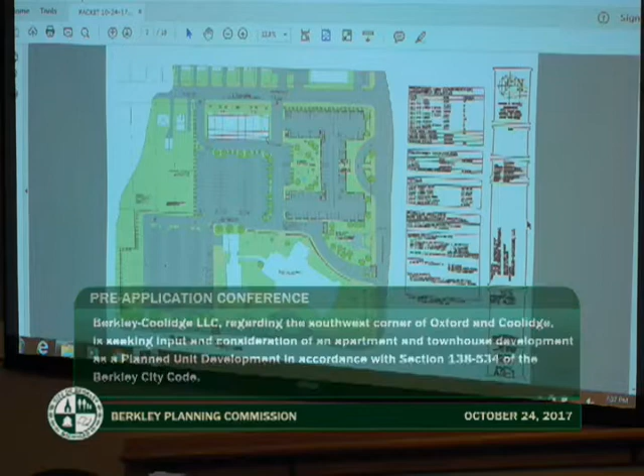From the Coolidge Highway view heading westerly, the building will contain new plantings of trees and shrubbery along the curved driveway, the building frontage, public park, and also upon the roof of the building itself, we use a sedum. The northern boundaries along Oxford Road will be lined with townhouses, each having varying trees and shrubbery, in addition to the existing trees along the streetscape itself. The western property lines we plan with mature spruce trees, and further along the north, virtually the western portion and the northern boundaries of that western portion, there will be short and tall plantings to minimize any vehicle lighting or other penetrations. Additionally, there will be masonry or other walls constructed to enhance the view.

Throughout the parking lot, we will have plantings mixed into the parking islands. Also, the courtyard of the building will contain a mixture of plantings, seating areas, and other elements to create a scenic entry point and a more viable atmosphere for the entry.

Number four is the provision of open space or public plazas. Proposed site and building plans will offer a greater amount of open space and public plaza. Along the Coolidge Highway frontage, there will be a public plaza incorporating permanent benches and tables, potentially for board games, trees, green and other flowering plantings, a public bus stop, public art space, and an adjacent flagpole commemorating the service of our veterans.

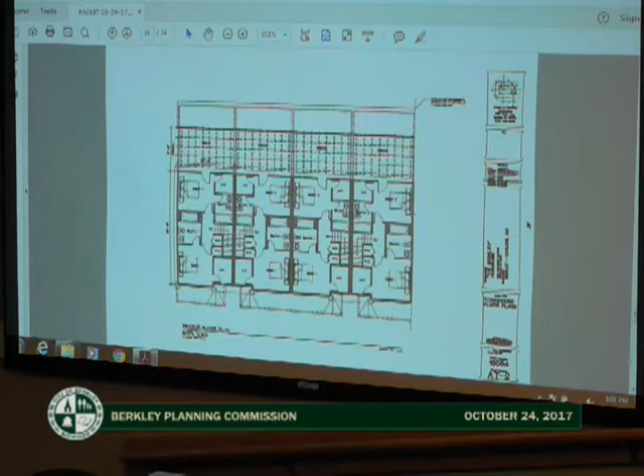There was a suggestion to try to clarify any kind of definition of seniors, as we've talked about our mix of the potential resident base that we'll have. Again, just to repeat that, we expect to have about one third of our base to be from Beaumont Hospital, one third of our base to be people of senior ages, and about one third of our base to be millennials.

To clarify that and create a distinction in how we refer to potential senior residents: active seniors, typically 55 and above, are still engaged in actions that are not necessarily sedentary. Seniors, primarily part of the baby boomer era post-World War II, want to live independently but do not require assistance to tend or fend for themselves. And seniors requiring assisted living, primarily older than those of the baby boomer era, have challenging health concerns or other situations that need help in feeding, dressing, grooming, reassurance of taking prescribed medications, or other ongoing assistance.

We do not intend to appeal to that segment and will not try to service that. We don't want to confuse anybody with those thoughts or definitions.

From this, we'd like to move on to the architectural aspects, which was the primary discussion two weeks ago at the work study session. If we could just go through an order of which we'd like to address these, we'll get into greater detail as we walk through the plans with you.

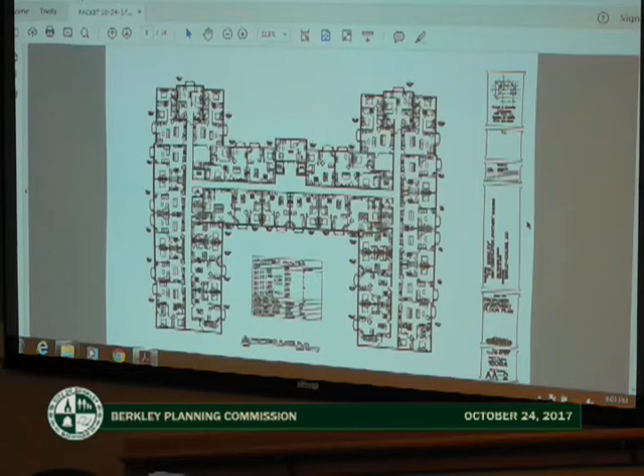Number 5, we have provided covered parking for a great number of our residents, as well as project and community assets only found in some of the finest multiple family projects in this area, or frankly anywhere. The placement upon Coolidge has mitigated the potential impact upon the adjacent communities, and the townhouse condominiums also eclipse the view of the parking lot in the rear.

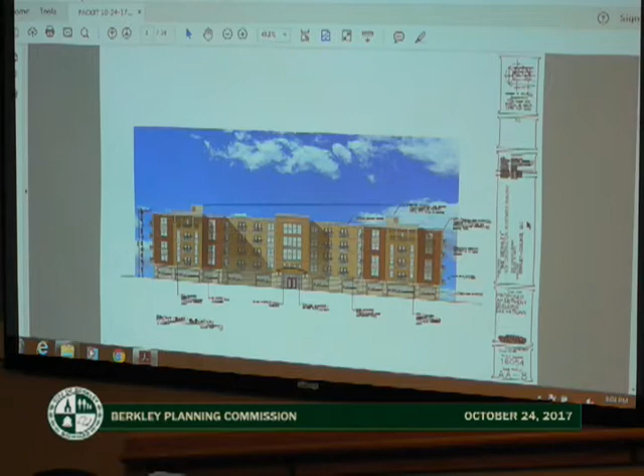Number 7, the design itself is a timeless design emulating a classic theme. Number 8, the podium structure allows for a more transparent view and lighter feel at the street level. For all those reasons, we believe this will be an asset to the community and the city of Berkley for many, many decades to come.

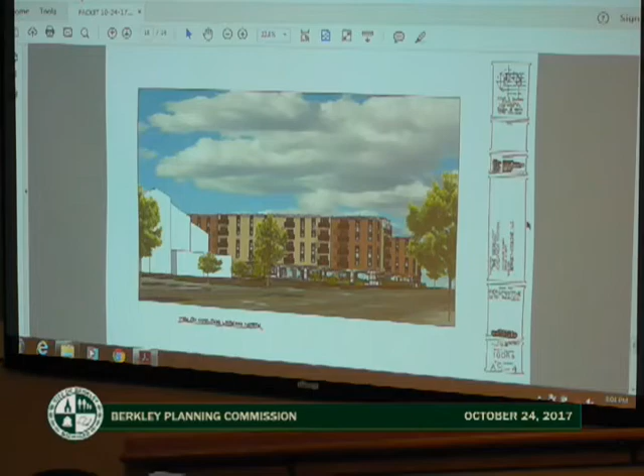Okay, so I'd like to start tonight with the Planning Commission questions. Who would like to go first?

Mr. Andgary: So at this point, are we really looking at these 7 items, and not getting into the minutia? We are looking to see if the applicant has demonstrated that they meet 3 of the 7 elements that could not be attained or obtained under a conventional site plan. Madam Chair, that's potentially meet, not prove. We're not proving tonight; we have an inkling.

More than an inkling. In that case, I guess I will start by saying that, 1 and 2, I've got the 7 items. Do you want me to just read the 7 items so everybody in the room has a sense of it? Sure, I can go ahead and do that.

So the zoning ordinance, section 138-534: the applicant shall demonstrate to the city that the PUD provides for the protection of the integrity of the surrounding neighborhood, and at least 3 of the following site design elements that could not be attained through a project designed under conventional zoning. Number 1, high-quality architectural design beyond the site plan requirements of this title. Number 2, extensive landscaping beyond the site plan requirements of this title. Number 3, preservation or enhancement of historic resources. Number 4, provision of open spaces or public plaza. Number 5, efficient consolidation of poorly dimensioned parcels. Number 6, shared vehicular access between properties or uses. And number 7, a complementary mix of uses or a variety of housing types.

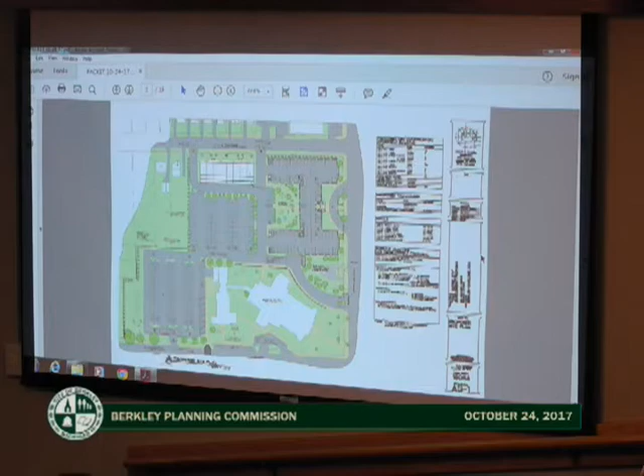Mr. Wood: Relative to your suggestions, from the get-go we've had no problem working with the city on a planned unit development. We don't feel there's anything we can't live up to or won't agree to in contractual form. Everything we've been presenting to you all along, we're ready to deliver, and it's something we will stand behind. Just to reaffirm, this will be a contract that we will carry through. It'll be recorded within the courts, and these designs, these plans, everything will be taken care of from A to Z.

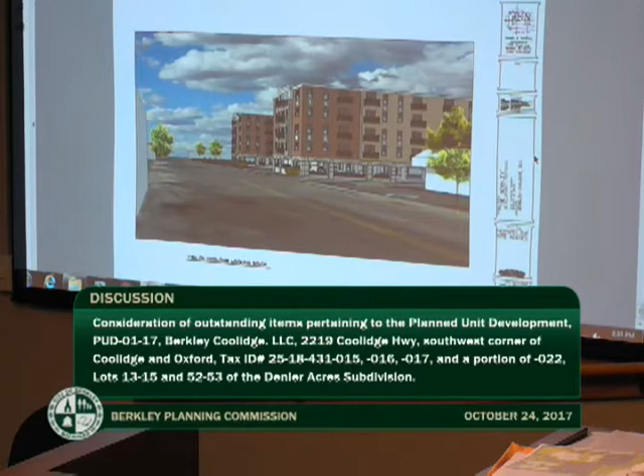One of the big successes with work-live apartments is foot traffic, and this is a great area for foot traffic. So I think it's something worth looking at. You could increase your square footage. And I think what will happen in the end with this parking, it would be very industrial looking rather than Main Street, and how our Coolidge is developing with all these boutique shops and restaurants.

I'd also like to see a little bit more contemporary ground floor than these stone columns that doesn't seem to relate to anything else historic within our community. So I hope there's still time to make some refinements to this. All right, thank you.

Brandon Alger, I live in Meadow Farm, sub of Berkley. I thought those were some great comments that she just gave recently. A lot of really valid points were brought up. I wanted to address an idea I had while she was talking about the sidewalk, that the driveways will cut across a sidewalk twice.

I don't even know if this is feasible. From a plan view, it looks like it could potentially be feasible. Instead of taking the sidewalk across it, would it be possible or reasonable to take a sidewalk around through the interior cutout there? Looking at it from this angle, from where I was over there, it looks a little more intense to do that, but I think it's an idea worth considering. I don't know if that ends up being reasonable.

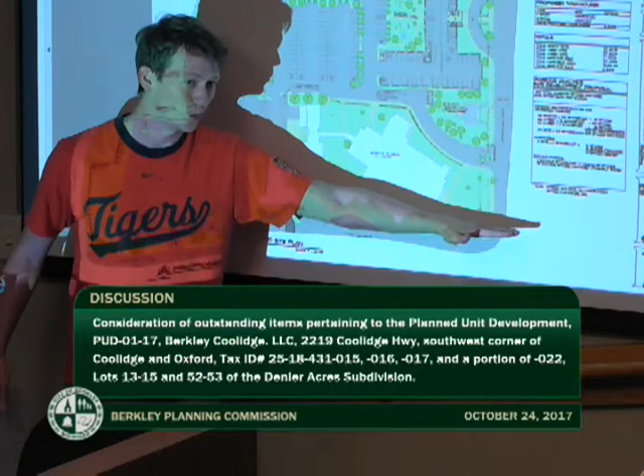So this is Coolidge northbound. Right here, the crossing guard is here. So if someone's coming this direction and turning left onto Coolidge, the crossing guard will hold that up so only one car turns left, and the right turn or straight traffic behind that car turning left doesn't get an opportunity to go.

That backs it up pretty far. I won't put an exact number, the traffic study has that, but if we're talking about a number of people using that exit as well, if that's kind of the primary exit for a morning commute, that's going to get worse. It's going to exacerbate an existing problem that at this point isn't bad. I don't really complain about it, but if I had to sit through 4 or 5 stoplights, that becomes bad.

Okay, all right. Number 7, one of the PUD application criteria that a lot of you were happy with was the mix of use.

I know I've made my ideas clear on that in the past, and some feedback has not been super positive, but I still maintain that 5.8% of the entire total units being owned condos, with the entire remainder being rental apartments, is a really poor mix of use. I shouldn't say poor, but for what you can get out of being critical using a PUD, you could potentially get something more mixed. Ultimately that's your decision. If that's what you agree is the best mix of use for Berkley, I assume you probably know better than I.

Provision of open space, they do have some open space. I don't know that it's much larger than my backyard, but it is open space. I think that's another opportunity to be critical. Just some thoughts. That's all I have, unless you have any questions for me.

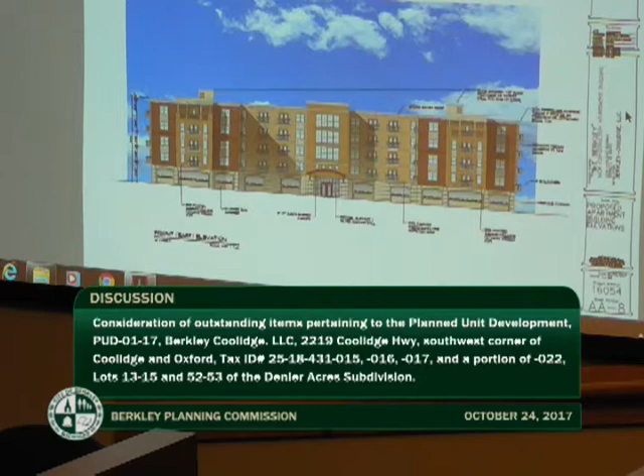If you could flip over to those. I appreciate the way there's relief to provide some texture and variation in the elevations, but I'm still seeing a lot of EIFS, and I know that's subjective, but personally I'm not a fan of it. I don't think it's one of the highest quality building materials aesthetically, and I'm struggling with seeing a building that's all brick come down and be replaced by something that's maybe 50% brick and 50% EIFS. That's my biggest concern at this point. I know the DDA is working on their design guidelines and hasn't made recommendations yet, but I believe they're moving toward high-quality brick-type materials. So this is the only thing I'm really struggling with right now, the facade materials, not the elevation design itself, just the materials.

Not to minimize your statement, and I know you're within this industry, but EIFS is a brick. It happens to be a thinner brick, but it's also carrying insulation. It's an easier brick to put on buildings, but it's still screwed down, it's glued down, and it has vapor barriers within it. It stands the test of time. If you simply scan the printouts you have there, you'll see some of the finest buildings in the world have been using EIFS for decades and decades. It's not a new product. It stands up against any brick, any other element. It is masonry, and it's also the same cost.

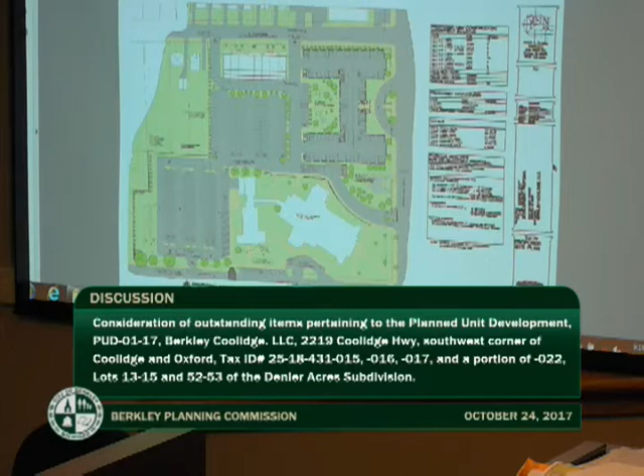Moving away from that, like I said, I realize this is conceptual and you don't have things exact. Are you going to pork chop that island in the driveway coming out onto Coolidge to make it harder to make a turn in there?

We intend to, if you couldn't see it up close, it says no left turn. Yes, we do plan on putting a pork chop in there. We want to work with the road commission first before adding that, and get their approval. On that topic, we also plan to meet with the road commission to adjust the timing of the light on Harvard. We think that will help alleviate some of the traffic.

I see there's some little evergreen icons in the pork chop that I hope won't be evergreens, because that would interfere with sight distance. No, those are low bushes. Okay, just wanted to make sure of that.

I have the same EIFS concern. If it's a brick veneer EIFS, I have less concern about it. I really just don't like the panel EIFS you see on every hotel that goes up near highways, I think it's horrible. But a brick veneer is a little more digestible to me.

Excuse me, we need some direction here. Last time we brought you 100% brick. We took your advice and broke it up into two different materials. I have no problem coming back with these different colors. There's two different colors of EIFS there, if you notice.